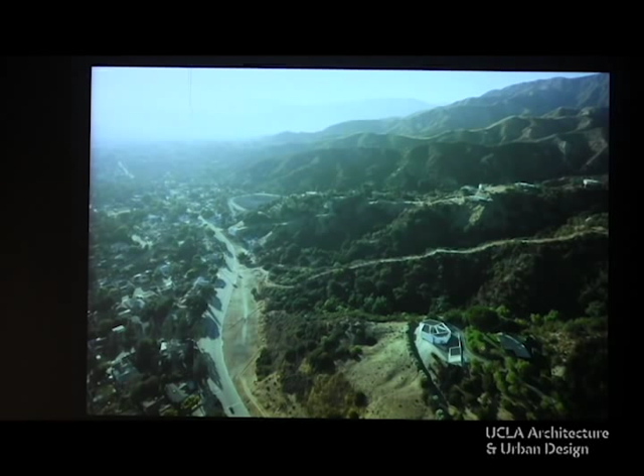In trying to figure out how to put these projects together, I've defaulted to a very logical process. I'm going to start with the conventional, maybe, and go to projects that are less traditionally architectural. What I'd very much like to do first is to start with a house.

A number of years ago, we were approached by two painters, Larry Pittman and Roy Dowell. Larry's on the faculty here at UCLA in the painting department, but both have significant painting careers, both teachers, but exhibit nationally and internationally. It was to develop a new house for them adjacent to an existing Neutra house they had in La Crescenta. La Crescenta is a suburb really built in the 60s and 70s in the foothills of the San Gabriel Mountains. When the Neutra house, the Serulnic house, was originally built up on the mountain, much of all this didn't exist.

It was a kind of incredibly bucolic landscape that the house was built on, about 10 acres of land, isolated in this quite rugged but very beautiful set of foothills in the mountains. You arrived to the house up a long road that went to the Neutra house, but there is an additional flat area that they decided they would build on.

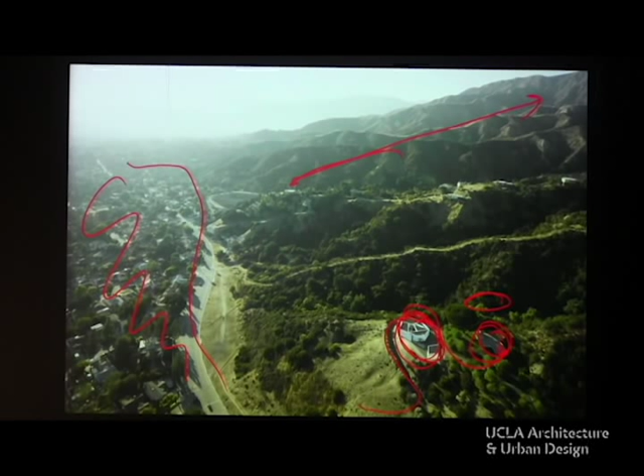They had no sense that they were going to build a new house. As you approached the new house up that road, that sense of approach, that sense of movement, that sense of spiraling up the hill led to, in many ways, the form of the house, which is a seven-sided house, in which the house almost seems to be moving with you or spinning with you. As an odd-sided figure, you can never quite understand the symmetry, and because of that it gives you the sense that you haven't ever quite understood the full form of the house.

You come up along the side of the road, and the house seems to be perched on a rock, almost spinning off of that rock. The landscape itself is almost tundra-like. You really get the sense that you're at the top of the mountain. The house is quite opaque on the exterior, and then finally you arrive into the entry court.

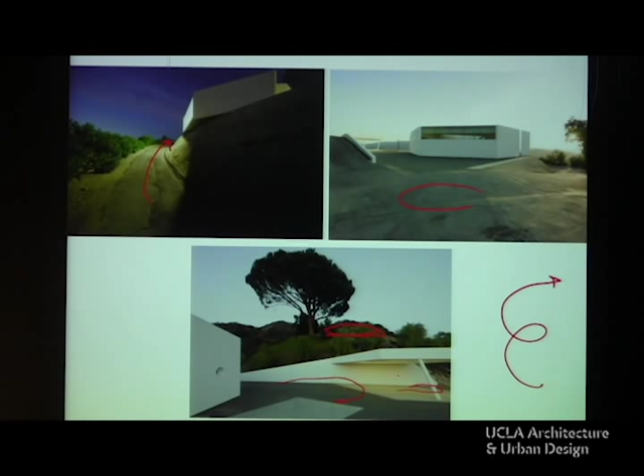There is a small carport, similar to the Neutra house, which sits up here in an extremely privileged, somewhat parental position, looking down at our project, which I was very conscious of. There's also this very beautiful, iconic stone pine, which plays into the form of the house as a whole.

You finally arrive in the carport and continue along what is, for the most part, a clockwise spiral all the way into the house. That unfolding sense of movement is very much what spatially animates the house, on both the exterior as well as the interior form.

Now, one of the things that struck me from the beginning was this relationship to the Neutra house. They were going to keep—and have kept—the Neutra house, using it primarily as a guest house and a library.

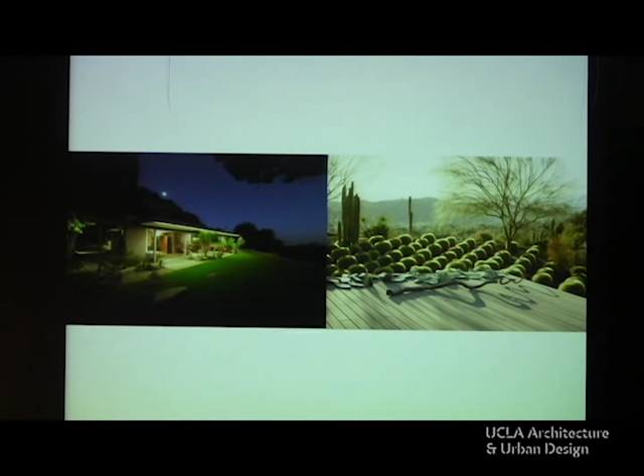But over time, that transparency and lightness of the Neutra house—the sense that in a way it was cold, and it also meant it was cold inside, with the winds blowing through the mountains—the house was built in that post-war sense of lightness. It's single glazed, with very large pieces of glass. The house rattles, it seems to move and shake and sway in the weather. That was something that became more and more of an issue for them over time. That romantic, modernist sense was becoming more and more complex to live with.

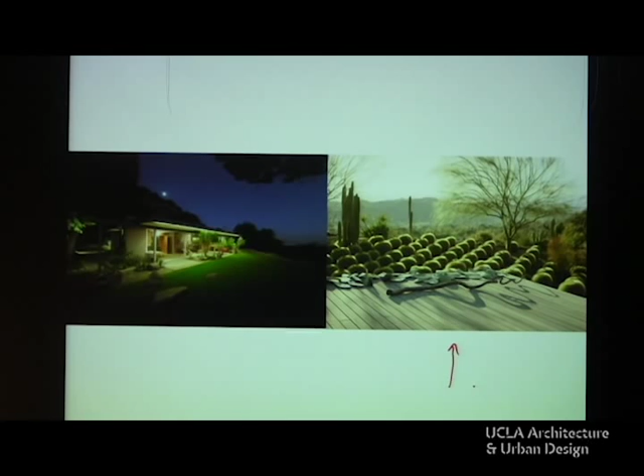We were about two months from finishing construction. That idea of starting to become more, at the very least, ambivalent about the relationship between inside and outside—about the transparency between the Neutra house and the outside—was something that was fundamental to our conversations about the house.

Over time, in the conversations from a design standpoint, it became clear it wasn't just an environmental sense of transparency that was an issue, but a larger cultural issue - this sense of always being connected, whether through work, through the way they showed, or being connected digitally. That became really the conversation about the house: the sense that to be completely connected all the time, to never have a private life, was what was potentially at stake in the design of the house. I'd go so far as to say this problem of simultaneity is maybe the greatest spatial challenge we face as architects and designers at this point.

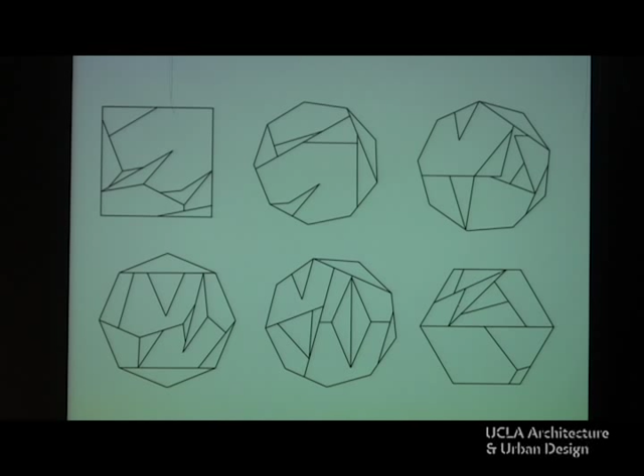What was more important for me was the way these diagrams could act metaphorically - as an inversion of the Neutra house. You took that pure geometry of the rectangle and sliced it apart, turning it literally inside out, so the opacity at the center of the house started to form the exterior walls. The transparency no longer became the outer perimeter of the house, but moved to the inside, so the opacity surrounded and enveloped the house, and the sense of real presence between multiple spaces happened on the inside, with the interior spaces completely interconnected.

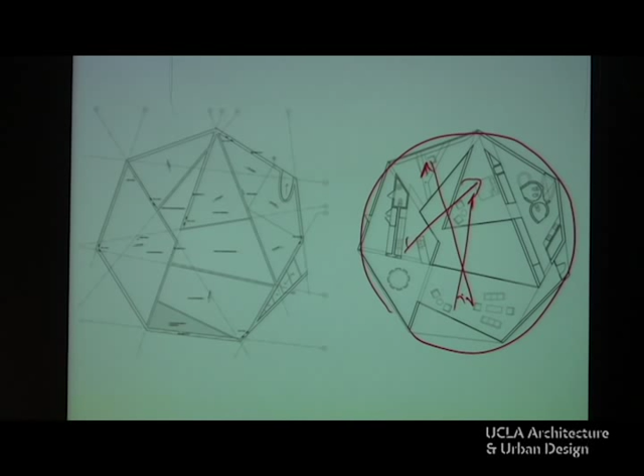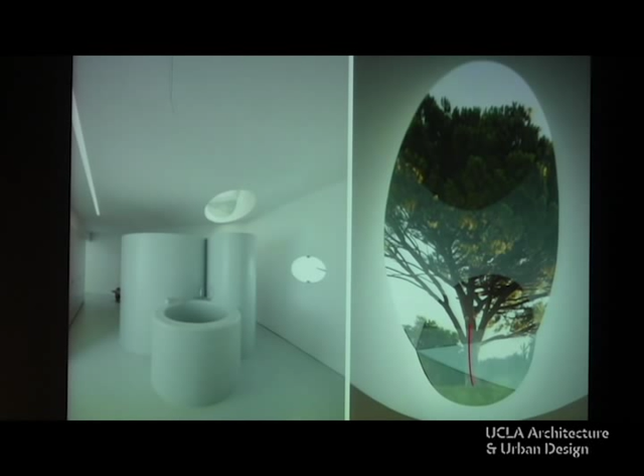There are moments in the house, as you move around it, with very particular and calibrated views to the surrounding landscape. The house may feel at a certain level as if it's spinning, but there are also moments where you can really take your bearing - in some cases looking at iconic elements like the big stone pine, which is the landscape connection between the Neutra house and the new house.

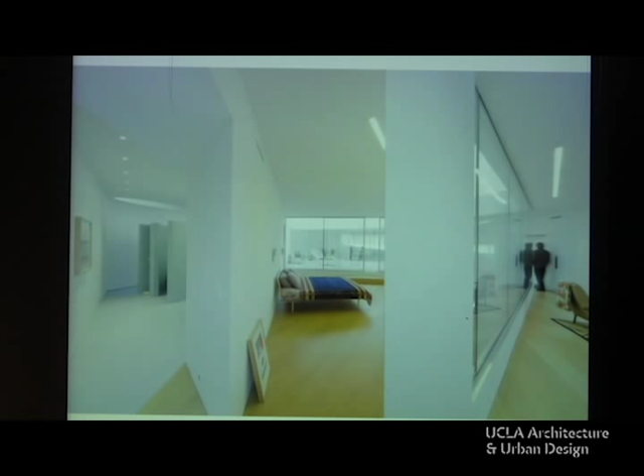More often than not, the spatial condition inside the house is one in which multiple spaces are understood all at the same time - whether it's the library, the bedroom and the bathroom, or the passageway, the bedroom, the outside courtyard, the living room, and the space beyond. These spatial shish kebabs, where all those spaces are present at the same time, are much more characteristic of the house and become, hopefully, its spatial quality - as opposed to the challenge that the Neutra house was becoming at both an environmental and cultural level.

A number of years ago, one of the very first projects I worked on, really the start of the office, was a project for a school of inner city arts. I'm not really going to talk about it tonight - it was an important project for me. It's a nonprofit school for children in the LA Unified School District, primarily in the Skid Row area, in the factory district, immediately proximate to downtown. I love this image because I think it tells you as much about the city as it does about the building itself.

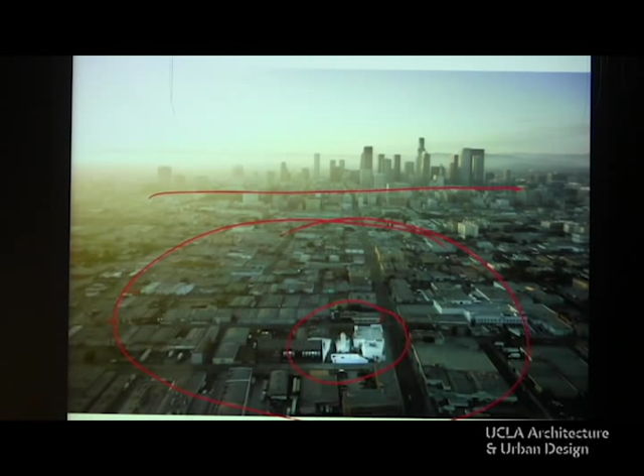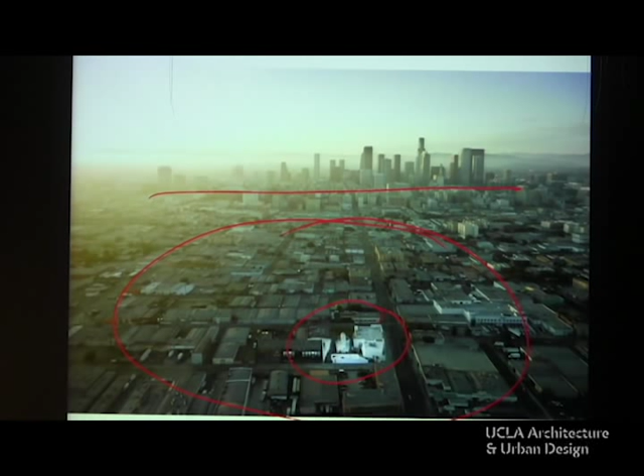What's important about this, and why it relates to the other projects I want to talk about, is that the real question was whether architecture could even exist in this kind of context, this kind of place - could it stretch and be elastic enough to have a real presence somewhere most people considered completely anonymous, an unlikely context for work of this kind. That led to a group of projects we've been involved in for probably the last 10 years: housing projects for a group called the Skid Row Housing Trust, originally set up to build housing - transitional hotels for homeless individuals to come off the street for a few nights.

The social project of that was working at some level, but it was very limited. What they found was that most times people would move back onto the streets, back into Skid Row, so there was this endless shuttling or cycling for most of those individuals.

They approached us to design the first project, called Rainbow Apartments. The model was changing, moving from these small hotel-sized units to truly permanent housing. You could live here for the rest of your life. It was an apartment unit.

But the other thing that was important was that there were other functions brought into the project that they were not equipped to really handle, including a lot of the social and supportive services, so these buildings took on the responsibility of not being just about housing, but truly being these microcosms of people's entire lives, very much the heart of a particular community.

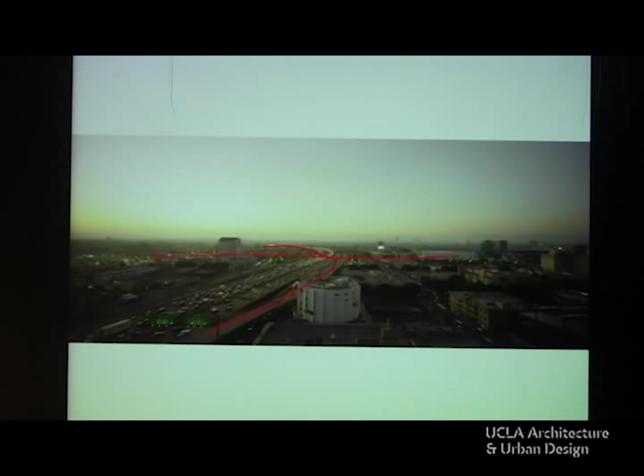This is the 10 freeway. We're about 20 feet away from one of the on-ramps and off-ramps to the 10 freeway. The 110 is right here. Staples Center, LA Live is immediately adjacent. It sits right on Hope Street. Ironically, it's the terminus of Hope Street.

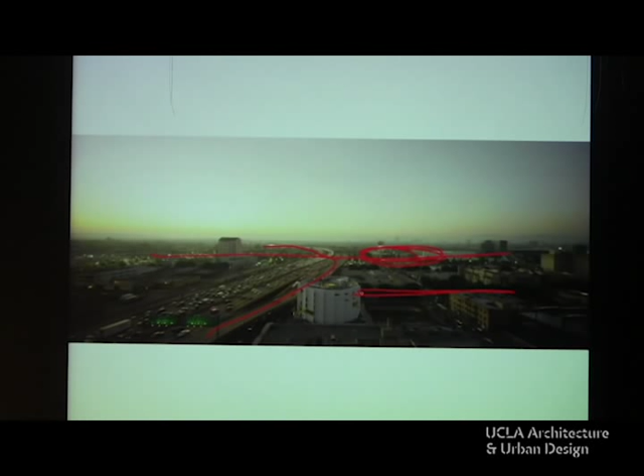One of the challenges of this project was very much its relationship to the highway at some very pragmatic levels. One was acoustic. To deal with this project acoustically was intense. It's one of the reasons why the windows are smaller, had to be intensely developed from an engineering standpoint. They're like airport class.

The round shape started to begin to deal with that acoustically. It presented the smallest face in proximity to the highway, to the noise generating surfaces as possible. I was also fascinated by this problem we were having, a kind of arcane problem of building these projects, which was trying to minimize surface area, exterior surface area, which was the most expensive part of building, relative to the interior space, creating the most space. And a circle allows you to create the most floor area to the smallest amount of surface area. At least that's the way we started.

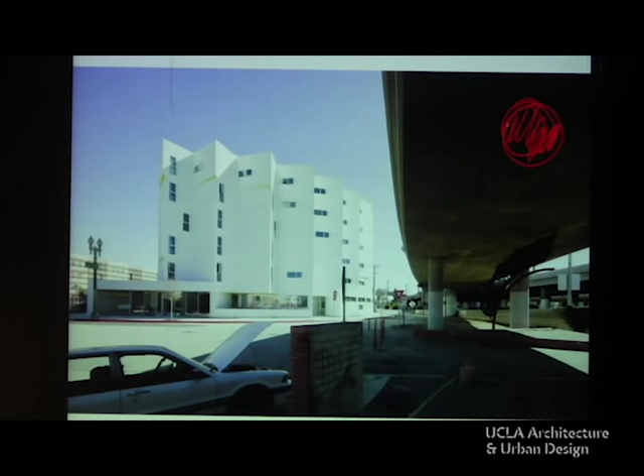But there was also a real ambition in this project to take advantage of this connection to the visibility of the site - making a building that in a sense didn't shrink from its responsibility to be present, maybe not iconic, but to be present in the city, and to have a strong formal role to the community that passed by on the highway constantly.

The ground floor of this project is very different than the way the rest of the scheme was laid out. The ground floor has many of the public spaces, but for me is part of the project that tries to have a stronger relationship to the underneath of the highway.

This question of infrastructure and the role of infrastructure as really a singular, a monoculture - that for the most part elements in the city like the highway only do one thing and throw away so much of the other space in and around it - was on my mind as we were doing this project.

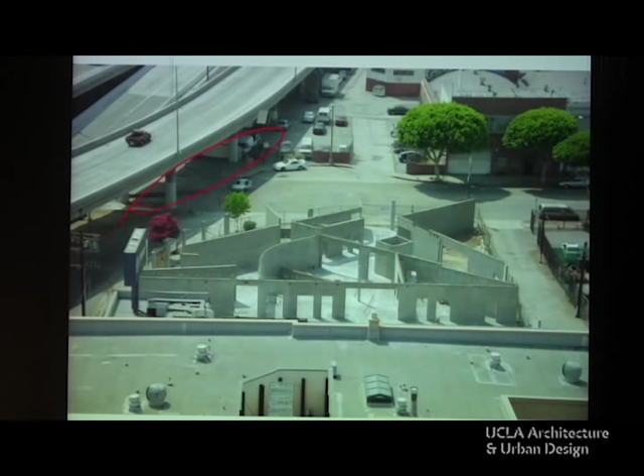I was trying to see if there wasn't some way of at least insinuating - we couldn't take over that space literally, but in some way making the building insinuate that there were potential and real relationships to the streets, the alleys, but the underneath of the highway as well.

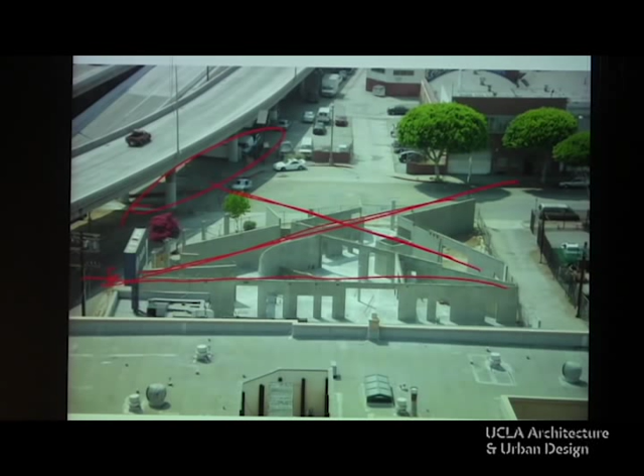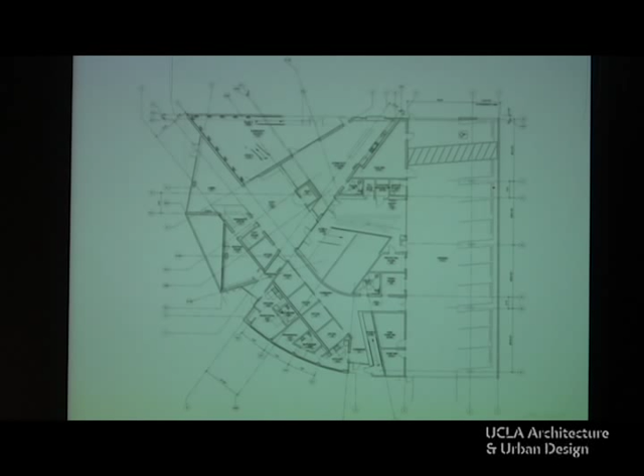So the whole ground floor of the building is made in the same way. It's made out of concrete. There are a series of axes which cut through the building that create visible, and when the building's more open, physical relationships through the building. You can see this is the resultant plan of those view corridors or skewerings through the building that begin to form the plan.

There are a lot of the social services along this corridor leading into a large community kitchen, community room, outside space. As you move up into the building, as soon as you get above that floor, the form starts to become much more related to the exterior drum form of the building.

It's an unfolding or shell-like spiraling of a series of trapezoidal units, all exactly the same by necessity, but serrated in such a way that they start to create small pieces of space that relate to each of those units. Each one is an efficiency apartment, kitchen, bathrooms in the middle, and then living areas.

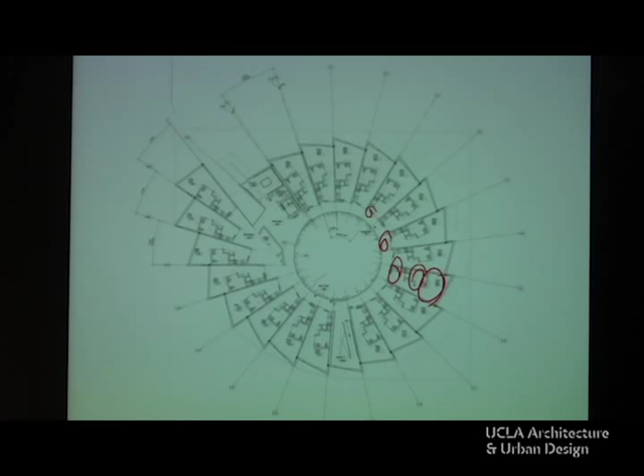These are the smallest of all of the units we've developed for the Housing Trust. In Rainbow, and also in this project, the courtyard was absolutely important as the heart of what could potentially be the community space. Here it was more challenging because the amount of space that we had was so much smaller.

Potentially, by being such a tight space, you could imagine it becoming almost like a panopticon, that the amount of intense surveillance that could take place in that space, written into the form of the building, could be problematic. One of the ways of starting to deal with that were these long fins that surround the entire space. They act as blinders - you can see directly across the space, but they begin to create much more visual disconnection or opacity immediately adjacent to you.

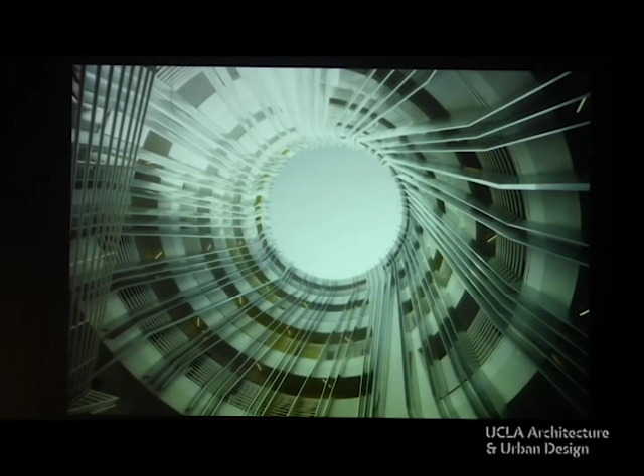They're quite effective in that way, and also become part of the overall building systems. This is looking up through that space, where the opening allows for a varied space over the course of the day - as light changes, the sky changes quite intensely as you look up through that aperture, and allows you a strong sense of connection to the outside, even though it's isolated from the sound.

Differently than the first project, Rainbow, which had most of the public services in one floor, in this project they begin to spiral up so that they're more evenly distributed vertically.

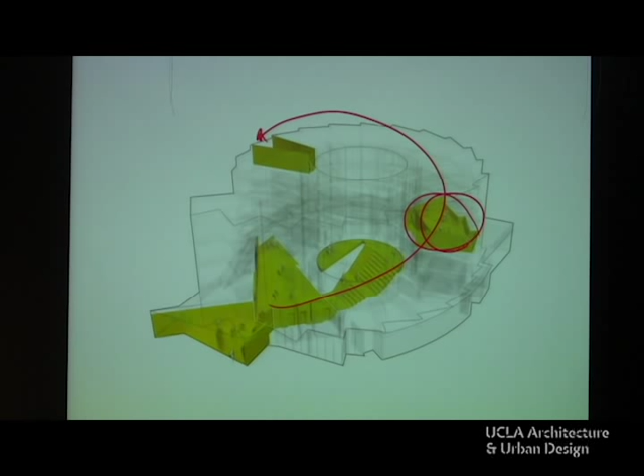One of the most important spaces is the community. There's a community room that has the laundry room attached, very prosaic functions in the building, but they're placed exactly at the same level as the raised highway, more or less on the third floor, so that the building in sections starts to at least try to create a much stronger series of connections between the community that's constantly passing by on the highway and the community that often is very anonymous in these buildings.

The space becomes a kind of front porch, and specifically when the traffic during rush hour is slower and stopped, there is a very intense set of relationships that take place between people in that space and who is watching and who is being watched between those two spaces.

The third of these projects that's in construction right now is the Star Apartments. Star Apartments is back for the most part on Skid Row, on the corner of 6th and Maple Street.

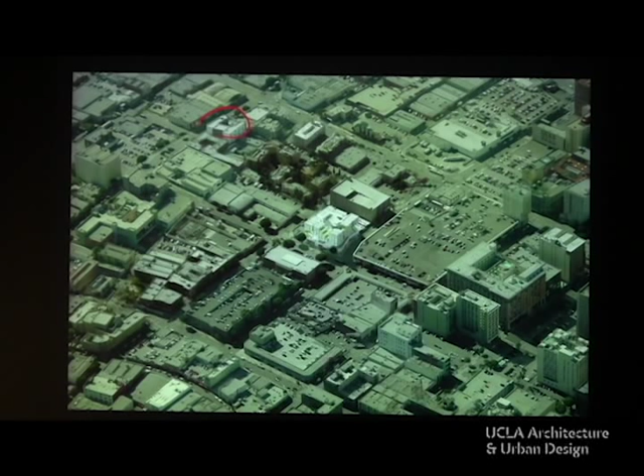Rainbow Apartments, the first one I showed you, was here. Julie and Hank Koning Eizenberg, this is a little bit before that photograph, but did a project, the alley right next to that, a couple of years ago.

This is in close proximity to many of the missions, but here the idea has changed again, it's evolved again with the Trust, who have been looking for years to create more complexity in these buildings, moving away from projects that are just housing to projects that engage the city in a deeper way, and to look at trying to do mixed-use projects. But there's a problem, which is that given the way that the funding happens on these projects, the rules that come along with the money, you're not allowed to be in anything but the housing business.

If you're in the housing business, that's what you're meant to be producing. You're not allowed to do other types of projects. But eventually, the Trust found a loophole in those regulations that said if you had bought a project that had retail or some other use, or you already owned one of those projects, you could keep that use.

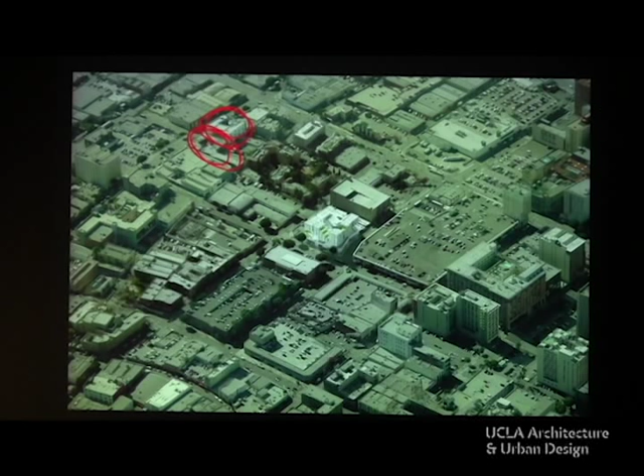So they went out looking for a commercial building, and they found this building, which is the ground floor, will be the ground floor of our project. We're changing it some, but it's a quintessentially Los Angeles building. It's a one-story concrete deck building, parking on top right now, stucco exterior of the building, no parking underneath, storefront all around.

This is interesting at a lot of levels. I think, one, because of what the Trust is trying to do, but I also think that one of the challenges in contemporary cities, and especially in a city like Los Angeles, is the reality that density is starting to change the city, is starting to change the equation of the city. And that's happening for a lot of reasons, but you can begin to see that happening in places like downtown.

And it's not so much that downtown is really the center of the city. I think that conversation is long past. It doesn't matter that it is. It isn't. It has other characteristics. But you can see density starting to have an effect on this part of the city.

I think the real challenge for a place like Los Angeles is how to invent the response to that in ways that are uniquely related to Los Angeles, that deal with the underpinnings of the way in which this city has continued to evolve, as opposed to importing other models from more traditional cities. And imagining that you would keep a building like this as opposed to scraping the site is fascinating to me, because I think it at least indicates an increasingly strong or visible conversation in the city.

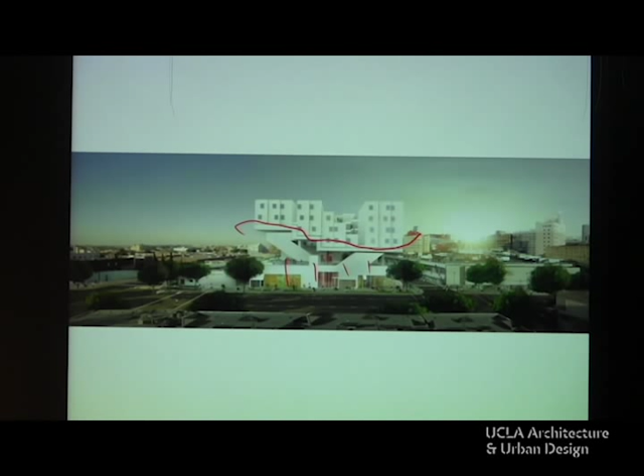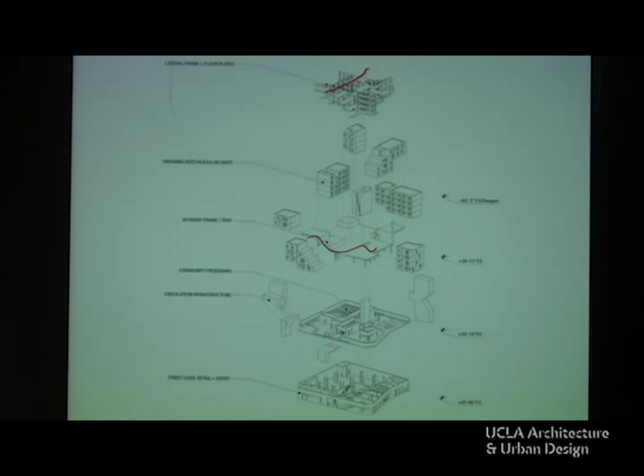It creates a whole set of complexities, but one of the things I think is very interesting urbanistically here is the diagram of the way that's starting to be developed, the tray, the different units which are all prefabricated and stacked on that tray, an interior seismic structure that allows the building to perform horizontally in the tray.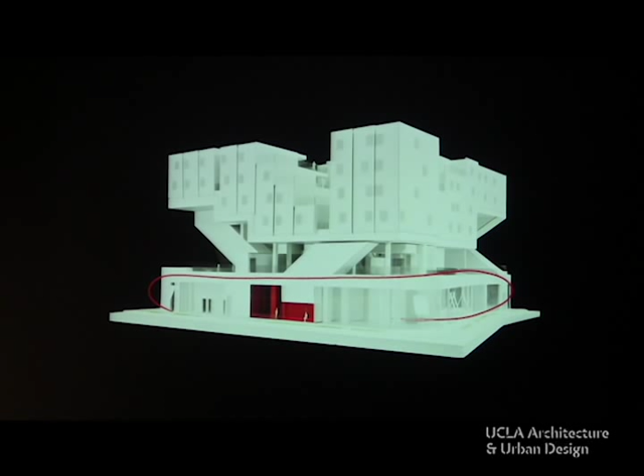What has become very interesting to me about this project is this idea of a building being a kind of potential overlay or condensation of different urban impulses. So you have the ground floor retail mixed use, this middle space which starts to become a horizontal public and semi-public space, and then the units in this intense density up above.

That middle space has many different functions: basketball court, a jogging track, community kitchen, laundry room, computer room, community garden, all on that horizontal plane with views out to the city.

Then the units themselves are in a kind of hyperdensity. There's no real courtyard here. These are stacking diagrams. This even gets more filled in, so the density is even more intense than you would ever find in a city like Los Angeles. The collaging of this into a type of Neapolitan sandwich, in which each of those components seems quite distinct but are absolutely interrelated vertically, makes for a very peculiar but I think kind of interesting project.

We are doing the housing units in a prefabricated way. It's the first multifamily prefabricated building that's been built in Los Angeles in 40 years. There are a lot of reasons why it hasn't been possible, but part of the work of the practice was to find a way with the city to allow it to take place.

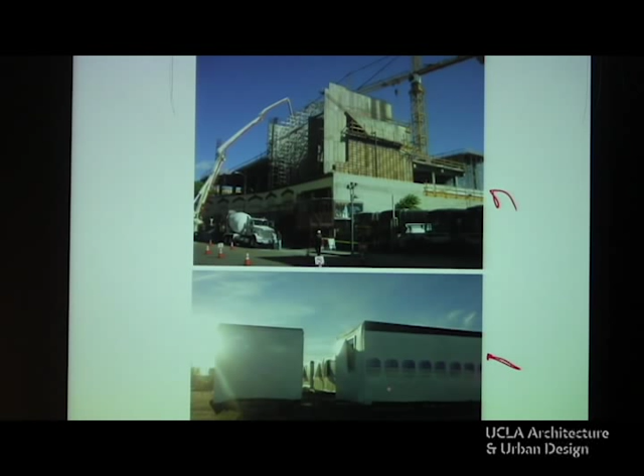This is just to say that it's in construction. These are the units in Idaho. They complete about 4 units a day. They go on a truck—actually, they're on a truck now. They're going to start stacking in about a week, and the entire stack happens in about a month, which is really incredible. There are a lot of ways to discuss why that makes so much sense.

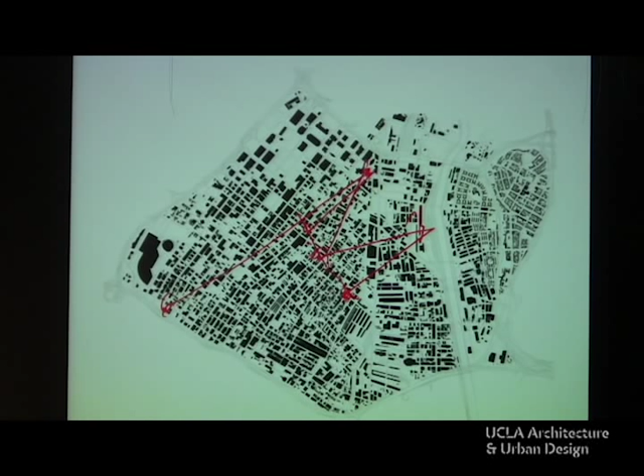I'm not going to get into it so much right now; maybe we can in the questions. But as a whole, each of these small projects—whether it's Carver, Rainbow, Star Apartments, some of the other projects we've been doing iteratively around the city—I think these projects, and the way in which they have the potential to be connected, to begin to think of all of them as a more interconnected project as a whole, is a different way of approaching large-scale change in the city.

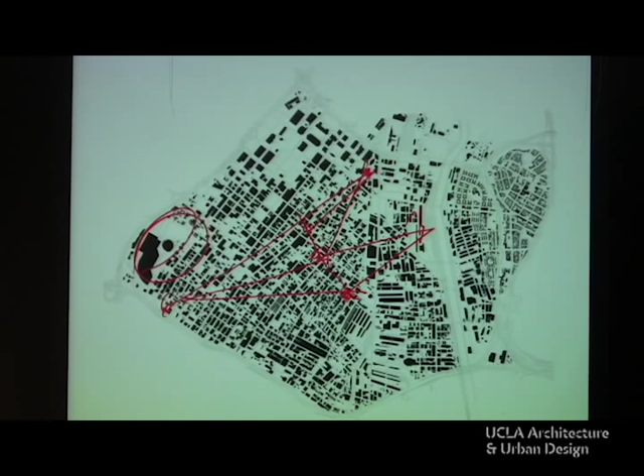Most times we think that projects like LA Live, that have a huge gravitational presence in the city, are the way to transform cities in a positive, progressive way. And maybe that's true. But I also think there's another way for architects to approach the city in a more temporal, iterative way, in which the impact builds up over time, responds to the city over time, and has just as great—if maybe not even greater—ability to remap the city because of the connections made between those projects in a very real, ongoing relationship to the life of a particular city.

That idea of creating a more interconnected set of temporal itineraries—urbanistically, a more temporal set of choreographies—in larger urban situations is interesting. But I've also been continuing to think about whether it's possible to do that in one project, whether it even makes sense to try.

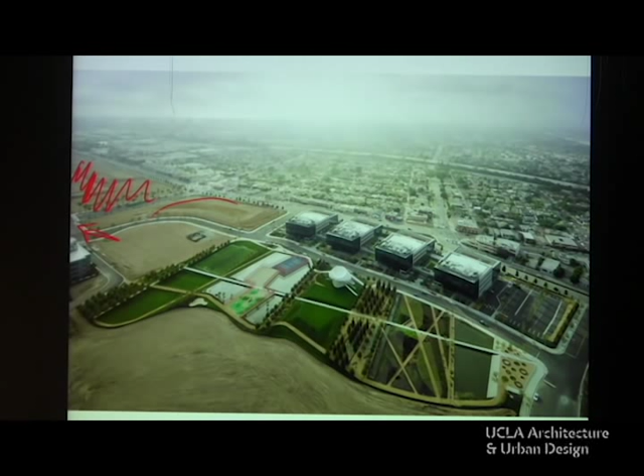A couple of years ago, we were asked to do a park project, as landscape architects, or as architects doing landscape architecture, in Playa Vista. Immediately adjacent, the major part of Playa Vista, all the housing is happening here. The Spruce Goose, the hangar, is over here. This is part of a larger office development at the far eastern end of Playa Vista. We were originally hired to do 2 buildings by Tishman Speyer, speculative office buildings, on the corner.

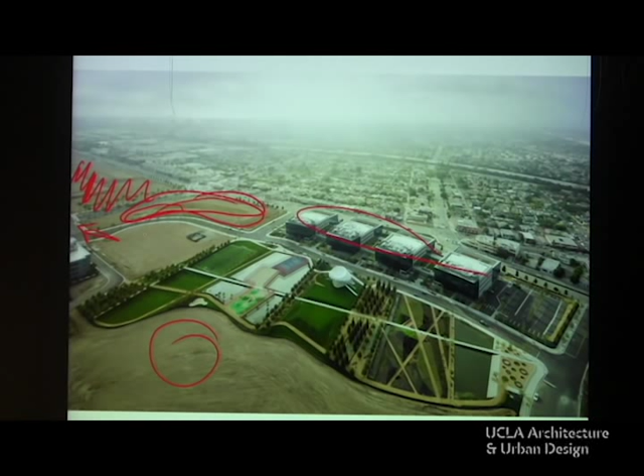That was 2008. They asked us to do the project—I think it was on a Friday. The economy ended over the weekend. On Monday, the projects disappeared. But because of these other projects, the park was still going to be built, and they asked us, over a series of conversations, if we were interested in being involved. I was, because I believed the park might have had a catalytic relationship to the way development would happen over time in this part of Playa Vista—it would be pretty much one of the first things.

So it would at least characterize the way that development would take place. I was thinking we approached this project not so much as a park to be looked at by the buildings that surrounded the park, but really to be an extension of activities, a more 24-hour campus.

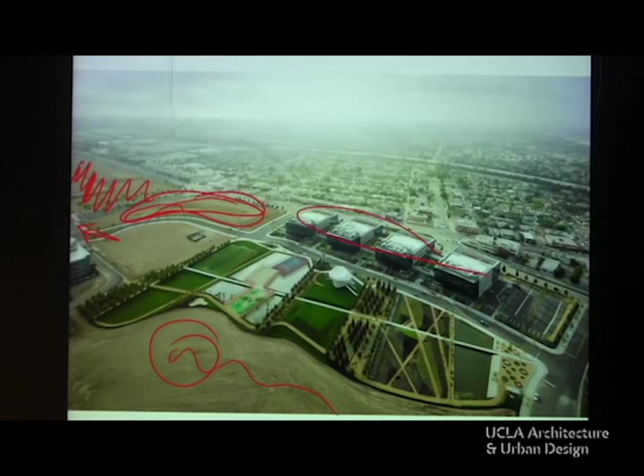The types of buildings, the type of culture they were trying to build here, which revolved around a lot of entertainment businesses, meant that people were going to be working here in the same way you work in architecture school. Your relationship between your work, your life, your social life was not distinct, it was all folded into one. So the park might become more of a bento box of activities, a kind of condensation again of larger social activities into one space.

The park itself creates a series of what appear to be bridges across from one side to another, allowing connections to be made from one side of the campus to another. There's also a long linear pathway that relates to one of the original runways on this site when it was Hughes Aircraft. But each of these bridges has a very different function.

It starts on the east side with a series of horticultural gardens where you can take horticultural classes on the bridge. There's a smaller shade bridge which has a lot of smaller, more intimate activities.

There's a larger performance bandshell and amphitheater space for large community gatherings. Courts, bridges with basketball, beach volleyball, children's playground, the lawn sports where there's soccer and a series of other lawn activities, and then a bridge that is in phase 2, a meeting bridge that will have Wi-Fi and connectivity in the bridge itself.

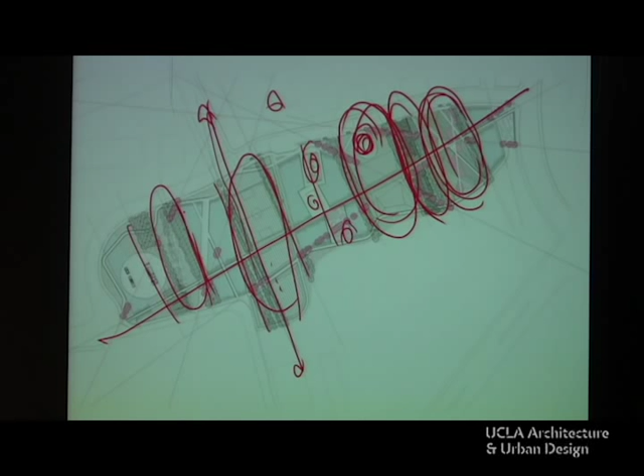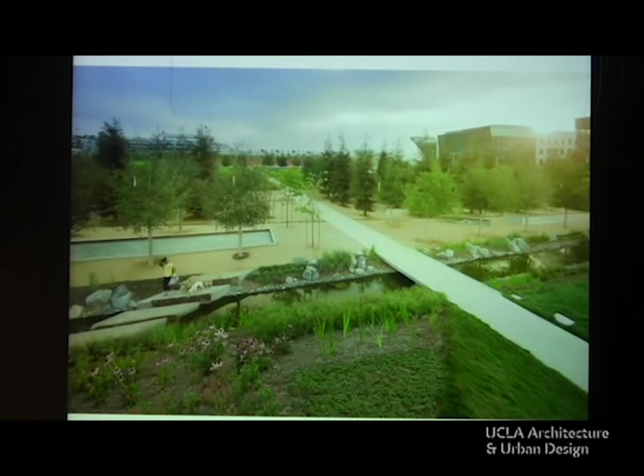Each of these zones or precincts has its own specific identity. And it's the collection of them, and the relationship over time of experiencing these gardens, that I think starts to produce a more cohesive possibility for identity—these are the horticultural bridges.

In a way, because I wasn't a landscape architect, I could step with freedom over the full history of landscape architecture, or felt like that. I was interested in the connection of the formality of the French garden, the garden of the mind in its formal structures, being connected with the English picturesque garden, the garden of the body, the garden of experience. It seemed like the right way of starting to meld the potential for those two different experience types in one garden.

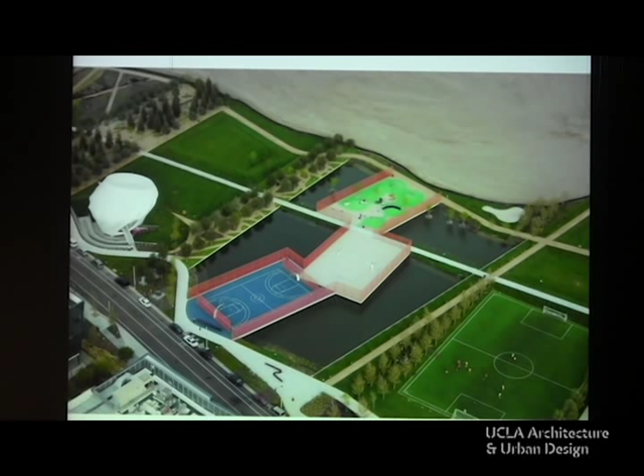These are just some of the views. One note: the bandshell, which really became the gathering point, the lantern in the project as a whole, was very much a structural problem. It was made out of fabric cladding with a steel structure inside. I was trying to create a structure that felt like it had a more animate presence, a more animate form, as if the interior structure was starting to create the figuration of the exterior form.

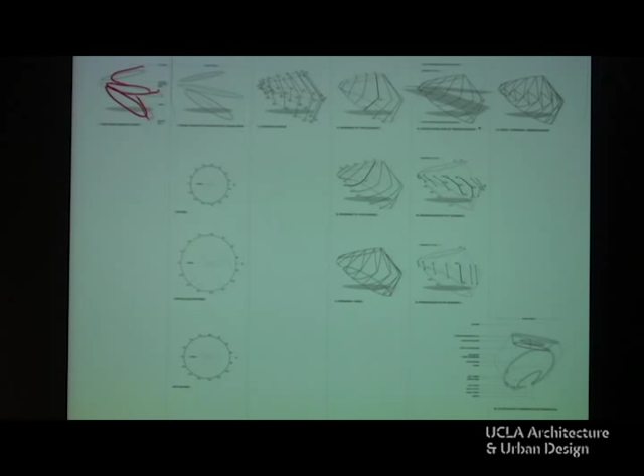It was produced by thinking of the structure as three separate rings, feeling as if they were all spiraling around or spinning off of one point, connecting that with a more three-dimensional space-like frame that held them up, and then cladding the whole project.

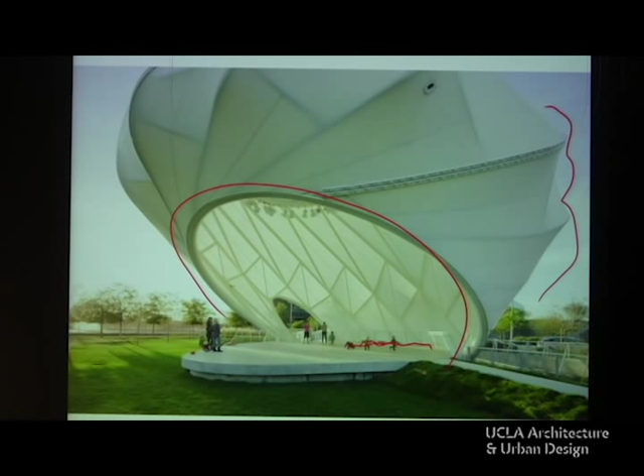Here you see both the figuration that's created by the tautness over that frame, and also the sense that the amphitheater is like a top spinning, possibly off of that one back part of the amphitheater, creating the large proscenium out to the hill of the amphitheater beyond.

I like this photograph also because, in a sense, the park has the ambition of creating an urban equivalent to the complexity you might find in a denser situation, yet it's surrounded by the most suburban of realities. Even when the amphitheater is empty, the sense that these suburban houses are in the balcony watching down, waiting for the activity to take place, I think is very telling about that particular place. But the ground that needs to continue to be made up is the conversation of what a city, what a contemporary city like Los Angeles means, what it looks like in the future.

We've been working on a project for a while at San Francisco State University, which is a building for the state university system. It's a very large project, about 300,000 square feet, a performing arts college that includes a series of performing arts spaces, but also a lot of teaching spaces. The goal of the university was to make a building that brought together the different disciplines, music, dance, drama, into one building, as opposed to being distributed around the school, because they're looking to create stronger interdisciplinary programming, which many schools are increasingly interested in, especially in the creative disciplines.

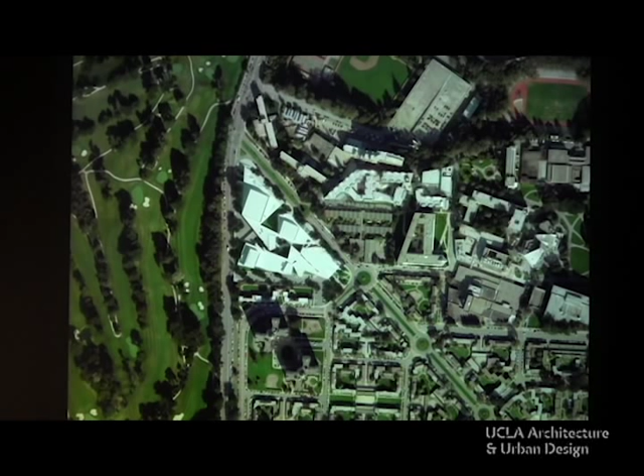It sits right at the edge of the campus, in many ways a gateway into the campus on the edge of Lake Merced Park. It has many different functions as it relates to the campus as a whole.

Our approach to the building was challenged by the scale of the project. Given the number of different programmatic elements, everything from little 80 square foot rooms to a 1,200 seat theater and everything in between, at 300,000 square feet, the building wasn't so much a singular or identifiable building in and of itself, but had to perform more as an approach to making or thinking about a city as opposed to a building. Many of the formal mechanisms of controlling, choreographing and developing the project were more akin to the way you'd approach a larger urban plan.

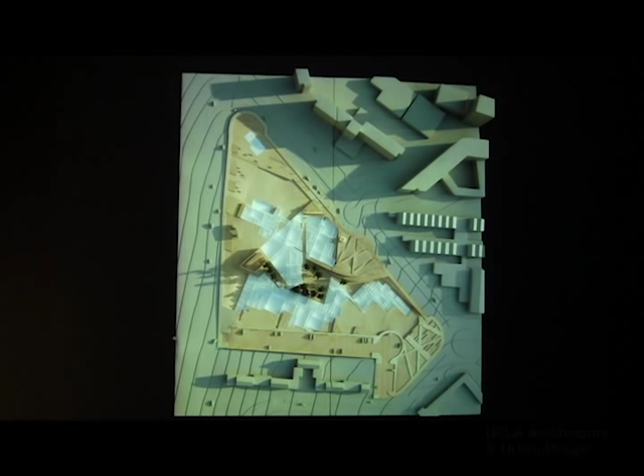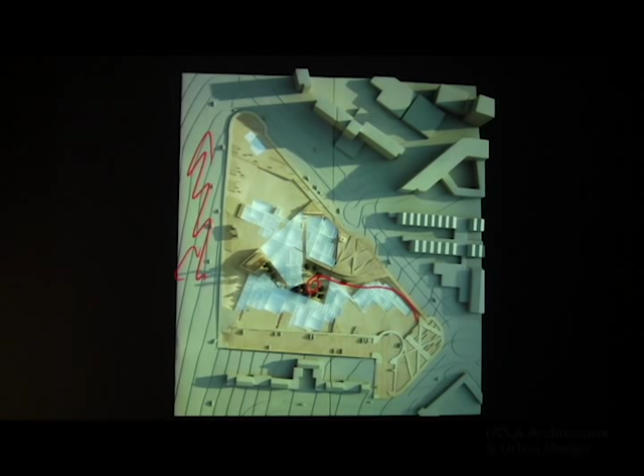It starts to come out at the lower level. There are many smaller production spaces pushed into the ground, but there are a series of courtyards which ramp down, bring light, and allow those spaces to open up, extensions of the landscape park on this side all the way through the building, so that you can move through the building without actually ever coming inside it.

As you move up a little more to the campus level, many of the larger spaces, like the 1,200-seat theater, a 450-seat theater, a small amphitheater, start to become much more visible and maybe more figural within the larger volume of the building as a whole. Up further now to different larger recital spaces.

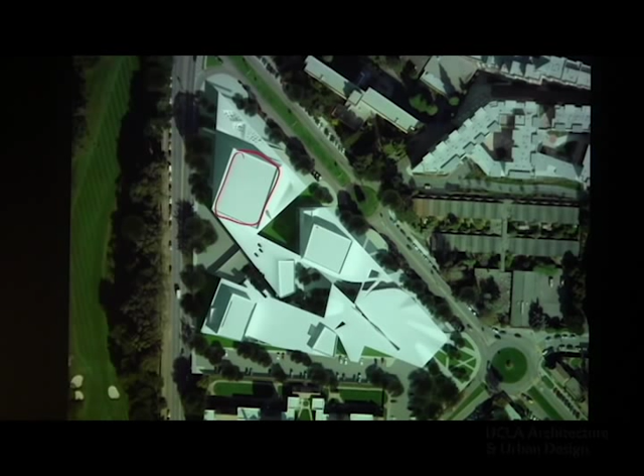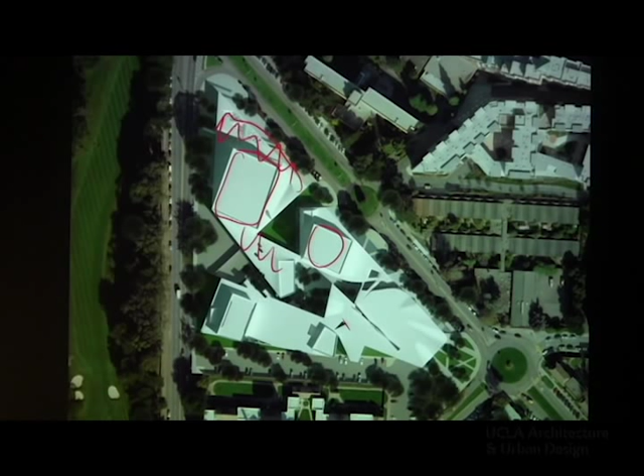Concert space, black box theater, the courtyard's moving through the space. And then up at the roof where you begin to see the relationship of the figures, the larger programmatic spaces, the grain or the roof that covers the grain of the different smaller intensive pedagogical spaces, and the courtyards moving through them.

Connecting all of those spaces horizontally is another idea related in many ways to the Playa Vista Park: there is one single floor, a kind of datum floor, at the second level that connects all of those spaces across. This is where the sense of true interconnection between these different disciplinary silos actually has the possibility to take place. In fact, we're trying to almost force people to move horizontally past and deep into the building so that, just through their transits, they become more visually connected, more aware of the other programs that exist in the building.

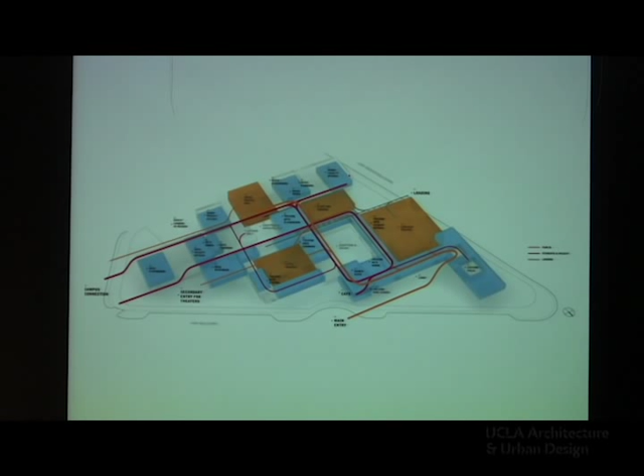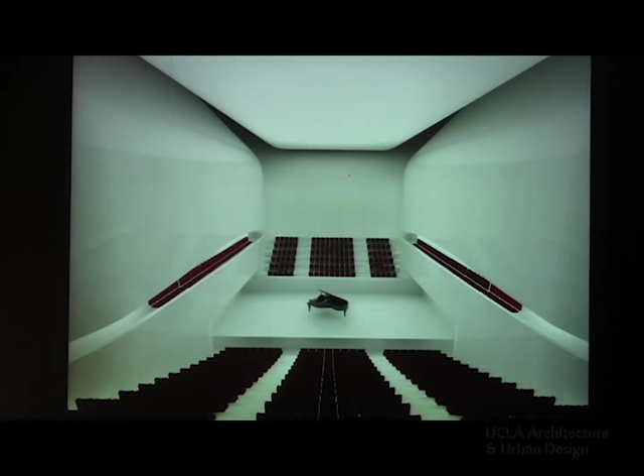Again, the complexity of the model and the form. The difference in each of the spaces here, each of the performance spaces had a completely different programmatic agenda, but also had a completely different aesthetic agenda in a way. They had a different role to perform.

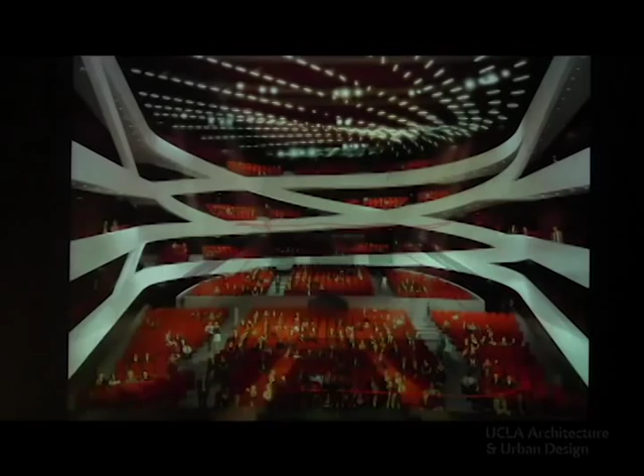This is the music recital hall, which is for the most part a shoebox space in which all of the corners disappear, allowing light to come in during the day, and artificial light to infuse the space during the night, but also allowing people to move and seem to appear and disappear through the space because the doors are normally open. So the space isn't just an interior concert hall or recital hall itself. It almost performs the function of a kind of plaza that on a daily basis people seem to emerge and disappear through.

The largest of the spaces is the 1,200-seat theater, which is a more traditional opera-like theater, with stacked balconies which produce the real advantage of bringing people very close, creating a real sense of intimacy for the audience. But as opposed to the normal hierarchical stacking of opera house balconies, instead we're trying to reinforce this cultural and social idea in the building of much more interconnectivity and social relationship, where the balconies quite literally start to weave into each other and create much smaller, more intimate seating pods or seating areas.

It also has the advantage of being able to scale the space. These spaces can be closed, curtained off when they're small—for instance, for a student performance whose audience isn't going to fill all 1,200 seats. You can create the real sense that the space is still filled even if it's 600, 700, 800 people.

We won a competition about a year ago for a project in St. Petersburg, Florida, to design a new pier. There's a pier there now, but it's outlived its life. It's the thing they all point to and say, this represents our city—the thing the Goodyear blimp always photographs during the World Series, always lit up out over the water.

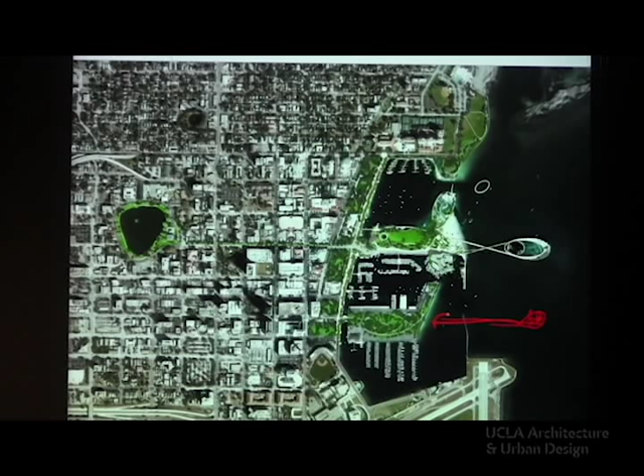We started with two ideas, two impulses. One is that the typical pier—you come out, reach the end, turn around, and go back. That's the entire experience. Instead, I was much more interested in developing a pier with a loop that creates a more unfolding and changing relationship, both in its circuit and vertically, in how far you get up off the water.

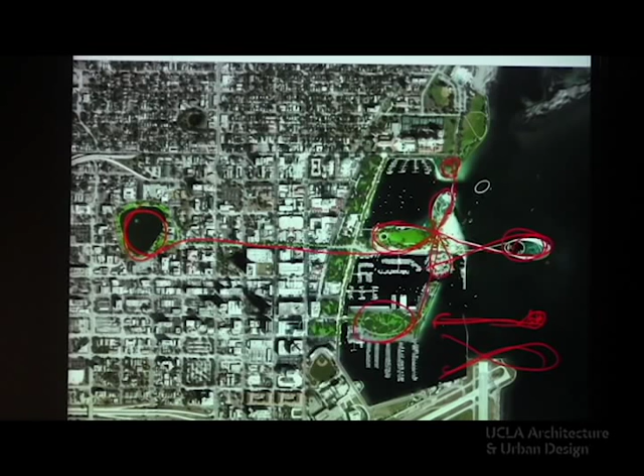That turned into a larger master plan, creating a series of loops connecting out to other parts of the waterfront, even up to a lake called Mirror Lake, so the entire pier could eventually be seen as an extension of a larger formal structure of movement in the city. The other thing the loop did, most importantly, was say that the water was the center of the project—the water was really what was at stake.

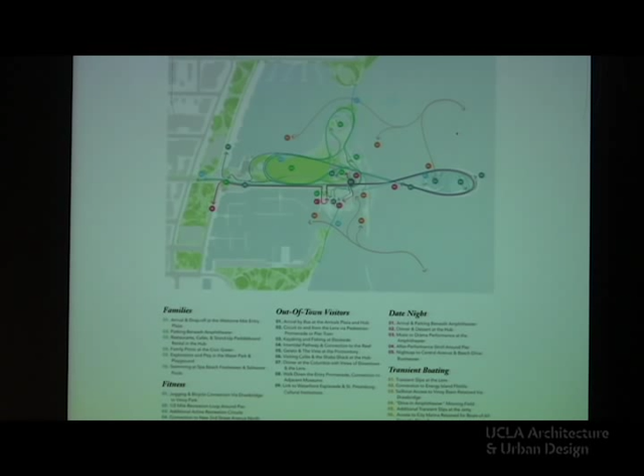Here you see a map of different itineraries that can take place. The project is meant to be both a circuit and an armature for many different types of activities—a place you can literally walk out to the end of, to see the city, to be out over the water, for people to jog, run, bike, or rollerblade—an extension of a public park, but also a project creating opportunities for many specific activities.

Learning spaces, a large amphitheater, a commercial hub, a beach, and environmental energy-producing islands are part of the project. I think this is one of the competing dilemmas in many social and public projects, especially in the US—the ambition to make these projects highly functionalized and extremely active, because there's an enormous fear that if there isn't something to do in these spaces, they somehow won't be successful.

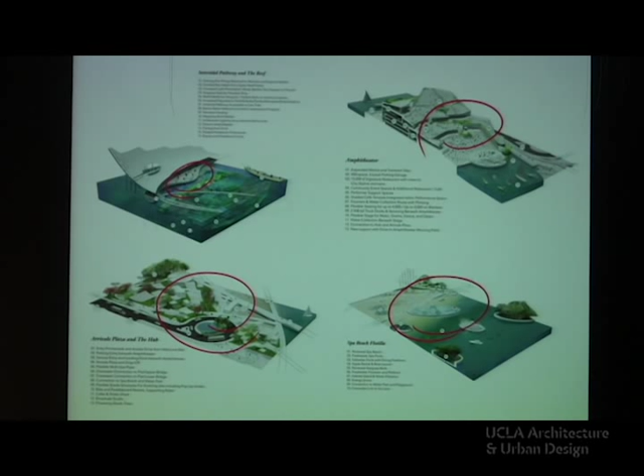But in a project like St. Petersburg, what's really at stake is putting you into a stronger, more consequential relationship with the experience of literally being over the water. It feels like that should almost be the sole role of this project—to connect you to something people often don't get to experience anymore. That conflict and back-and-forth, I think, is one of the characteristic challenges for an architect: how you navigate the design process to find the balance between those two relationships.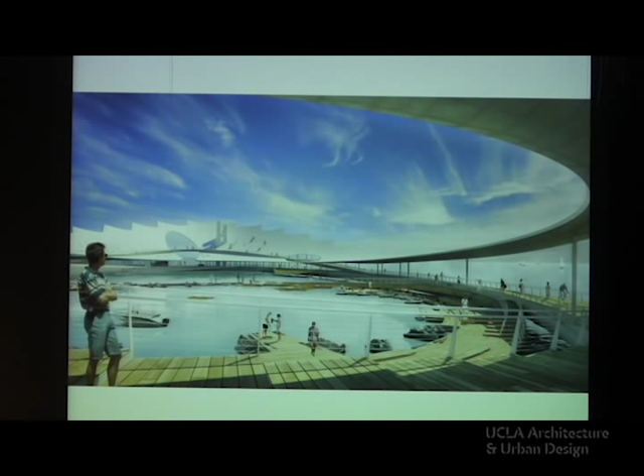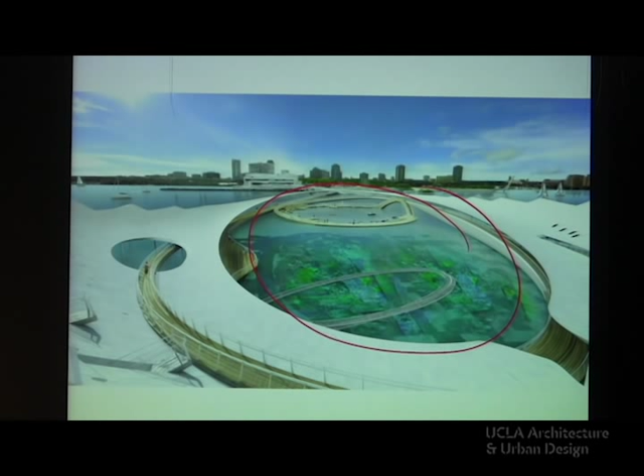Here you see the center of that space where there is a marina for unpowered and small powered craft to be able to go out on a kayak, but really to create this bowl-like space, to create potentially this civic and inwardly looking space at the center of the project.

There's an underwater garden, which is an estuary that Tom Leader, the landscape architect, is developing that is underwater but sits on the pilings of the old pier, so that there is in fact a landscape at the center, but one that is, quite literally, in the water.

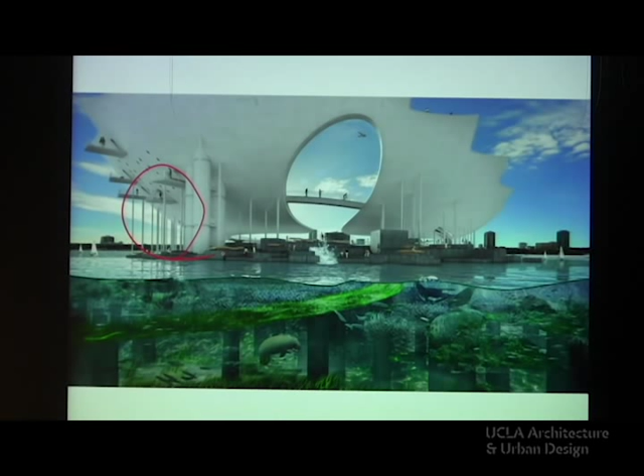The outside of the canopy is something that fewer people get to see, but the canopy as a whole starts to create a larger and very important civic overlook out to the water beyond, that provides for functional elements like shade to keep you out of the weather, but is also a place that you can climb up onto.

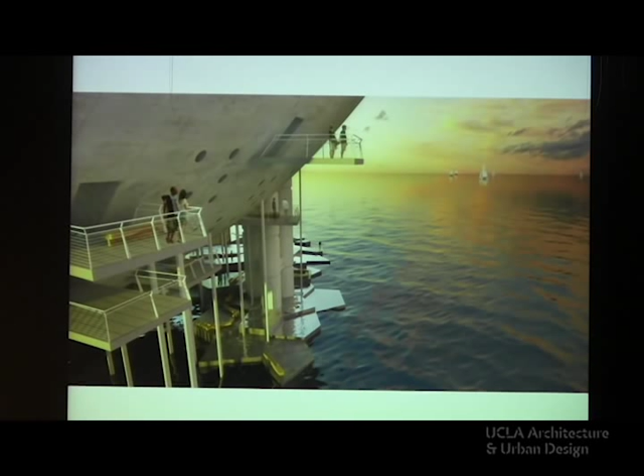So while the project as a whole is about the larger civic or public entity in the city, there's also the possibility for smaller experiences, more personal and singular experiences as you begin to climb up onto the shell with views out over the water and the bay.

The last project I want to talk about is a project that Hitoshi mentioned, Hitoshi was involved in as a member of the advisory committee, which is a project in downtown Los Angeles: the remaking of the 6th Street Bridge, in Los Angeles, over the LA River, which is now, for the most part, a channelized storm channel.

Probably the 6th Street Bridge is one of the most iconic of all the bridges. It's the one that you see in many movies, lots of films and commercials. The brief was to design a crossing, a bridge over the river, that had the same level of visibility. But the reality is that there's a long viaduct that connects Boyle Heights with downtown, and that is just as much at stake.

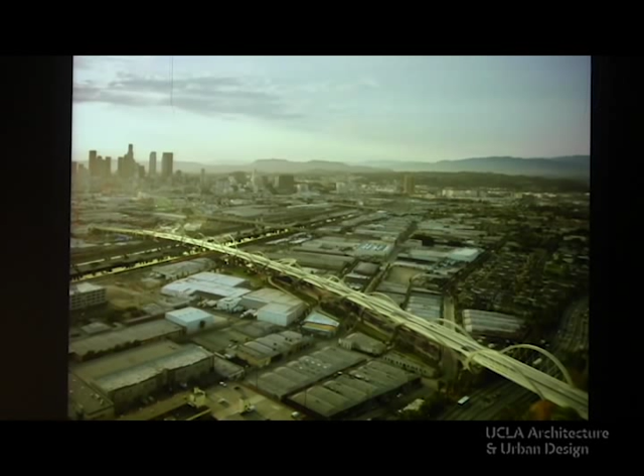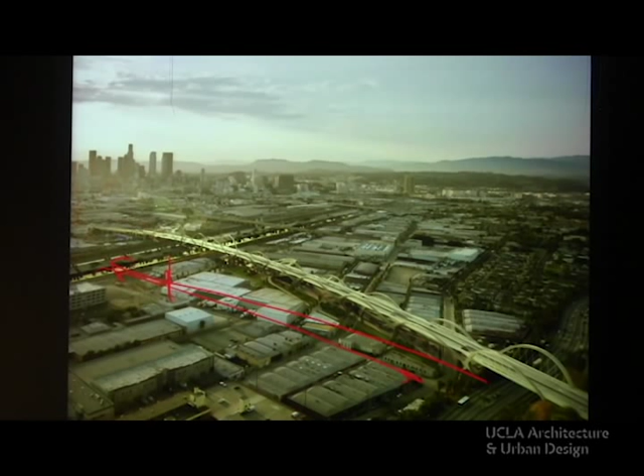The bridge that we've designed tries to take on those issues. One, to not create so much just a crossing at the river, but to literally take the entire 3,500 feet and create an identifiable crossing that becomes as strong an image as the original 6th Street Bridge has been, but then also does more work to quite literally create the connection from downtown to Boyle Heights.

But also to begin to create stronger and more consequential connections to what's underneath the viaduct and the bridge, including the river, the Los Angeles River, which is continuing to be rehabilitated and developed.

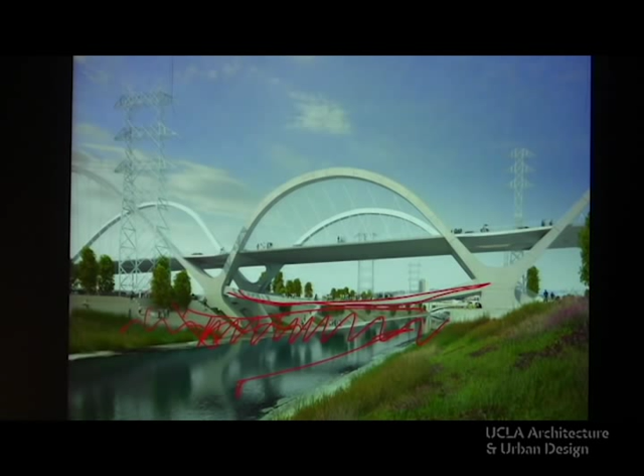Here you see the way that the bridge starts to create the land banks, but also that there's the possibility of a pedestrian, a lower pedestrian bridge, so that during the floods, when the water is at its most extreme, at its most powerful, at its most intense, you're able to get in great proximity to the bridge.

This starts moving across with the space under the bridge at the Arts Plaza in the Arts District, which can be used as a very flexible type of civic space.

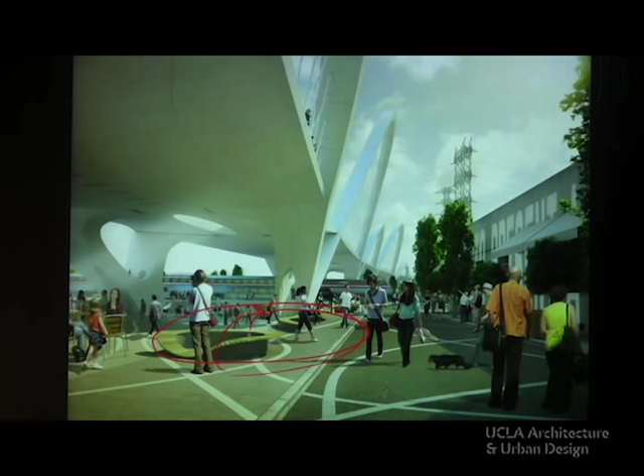It's also the place that you can get down to the river through the tunnel. You can see the train, which stays in the background.

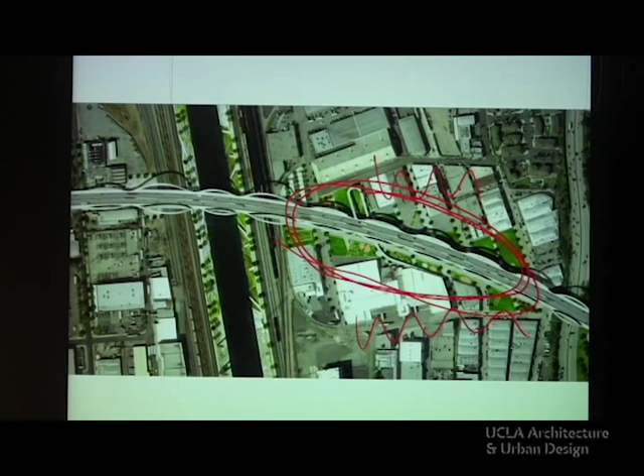On the industrial side, the realignment of the bridge allows for the possibility of a new park, but also connections to all of these different businesses and industrial jobs that are very vibrant in this part of the city.

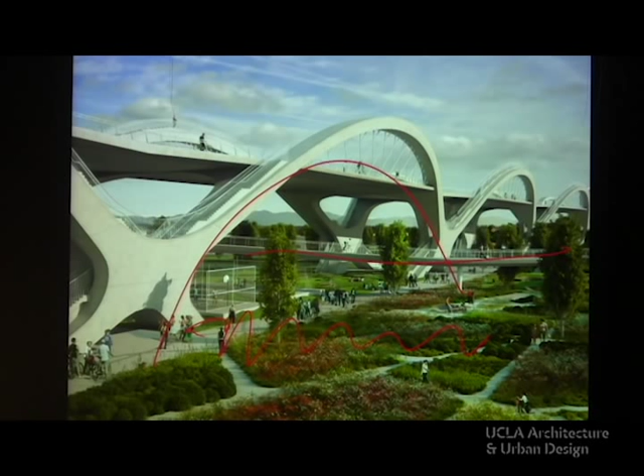The way in which the bridge and the structure of the bridge starts to become something which enables and activates the relationship between this new park space through ramps, bicycle ways, and pedestrian ways up to and down to that landscape. Again, a walkway up through the structure, so that the structure both holds up the bridge and quite literally produces and provides that access.

And finally, you can climb all the way up to the top of the bridge, which is potentially an enjoyable thing to do. But I think really, what I want to leave you with is this image, which talks about what's at stake with projects like this, at this scale. Architecture is very often about the form.

Very much about something which is identifiable and singular and stands for something. Architecture represents. I still firmly believe it has that capacity, in many different ways. But at the same time, projects like the 6th Street Bridge or maybe the St. Petersburg Pier create their relationship to this sense of icon in a very different way, not as something that's singular and is meant to be

looked at, but that starts to become a framework or an armature, a kind of observatory, that allows people to not just see the thing, but to see the city. I think too often people forget that projects that are always pointed to, like the Eiffel Tower, weren't first and foremost something to look at from the city, but were a way to get up and look out at the city, to not only see our present, but to potentially also see the future, to see what's emerging.

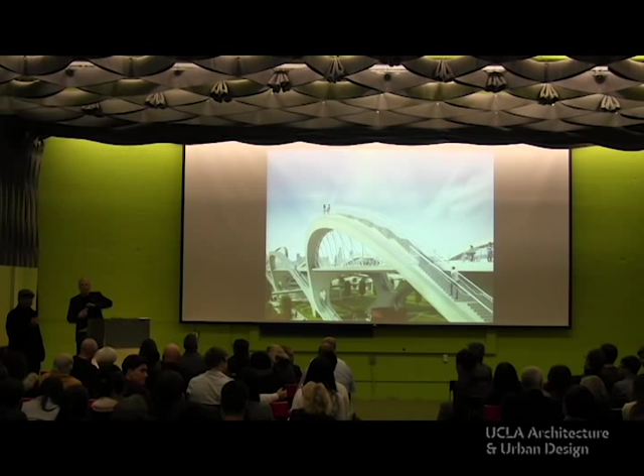Okay, is there any question from the audience? It's too cold. Okay, it's too cold, so.

Thank you, this was all very beautiful. My question involves the codes and those wonderful steps, fine for the vigorous and the young and the able-bodied. What about accessibility? Is there any way that same people can have the same great experience of seeing the city?

It is something that all through the design process we struggle with, because clearly that's an issue. If you're talking about trying to produce, at both a conceptual level and also at a very real level, that level of accessibility, that absolutely becomes a question.

What we've tried to do in the bridge is provide for a series of overlapping, multiple routes up and onto this thing. In some cases, like the hanging pedestrian bridge, you can begin to see this accessibility and bicycle and pedestrian ramp that leads up through. Those are quite literally accessible routes, to achieve the same level of experience, different, but equal, as somebody who can walk up one of these stairs.

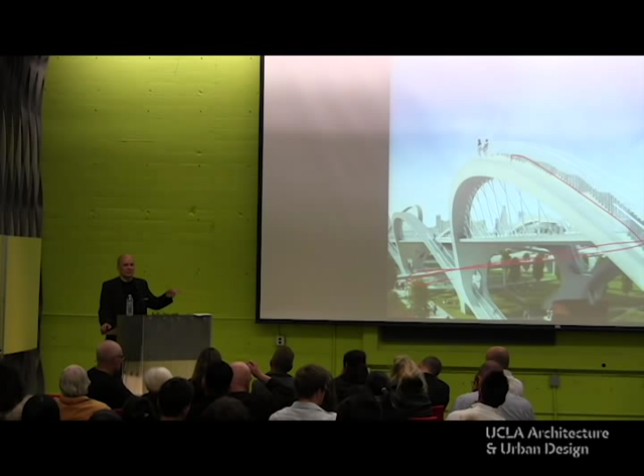What was fascinating was the way that the light changed over time, the way it affected that surface. I started to become much more interested in the depths of the surface, and surface in general, and the way it could produce qualities and impressions, as opposed to guiding you directly to the answer through the specificity of the material. I also think that because of your ability to read into that abstraction, there's the ability for the individual to have their own reading of it, their own connection to it. At least that's what I'm hoping for.

Especially in projects like the Skid Row projects or the Inner City Arts project, your ability to project something into that, and for it to change with you over the course of the day, I think is very possible. It has the potential to have a very strong impact. And if in projects like Inner City Arts, they're able to read some level of optimism through that connection, that's a result I'd be very happy to achieve. I don't know if that connects with your first question about hope, but I think in a way, that sense of the buildings in those...